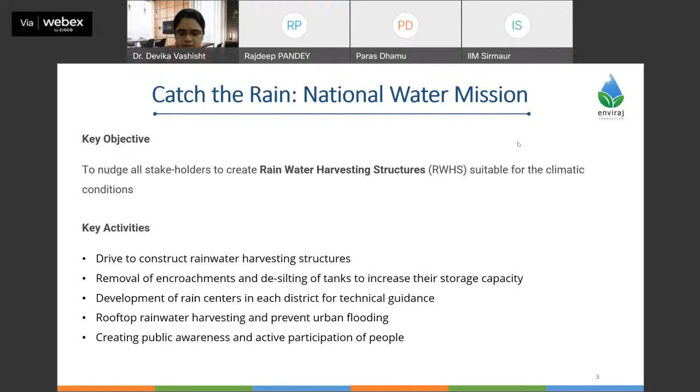So India will be a water deficit country in 2050. If we successfully implement the river interlinking projects that are already undertaken by Government of India, then we can offset 200 BCM, but still we will be water deficit by 127 BCM even in 2050. So I will be presenting another data, that is per capita water availability in India. So in 2001, the per capita water availability in India was 1,816, and in 2011 it was 1,545, and in 2021, recently, it was 1,486.

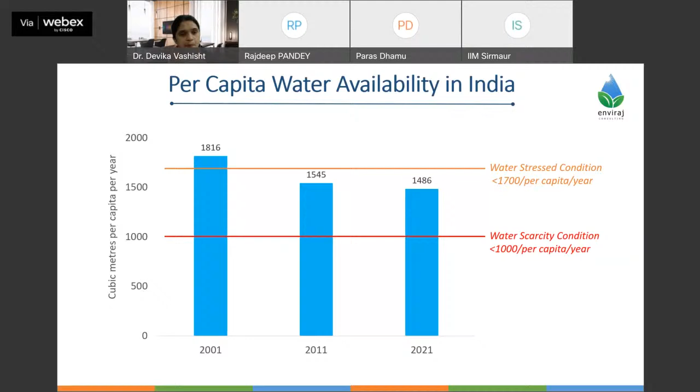So when the per capita water availability falls below 1,700, that condition is called water stress condition. So when this condition arrives, we can see the water scarcity, water crisis across the various parts of the country, that is already happening. So India is already under the water stress condition. And when this value falls below 1,000, in that condition, we can also see the economic impact of water in our country's economy.

So coming to another part of the problem, that is the urban flooding. So water scarcity is one problem, and urban flooding is another problem that is also due to the mismanagement of water. So I will try to highlight the very important case of the Chennai flood that we have seen in 2021. And in 2015, also there was a flood in Chennai. So many of the environmental activists and climate change activists relate every event to climate change. And I am a big advocate of climate change, but believe me, this event is not only because of climate change. Here is the reason, I will explain.

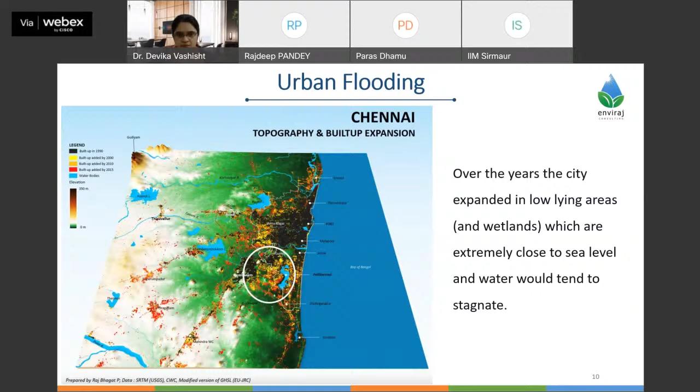So here, this is the topography and built-up expansion map of Chennai. So you can see these dots, orange, red, and yellow. So you can see that the flood-prone area lies in a low-lying area close to the wetlands in Chennai. So the expansion of the city in this area is so quick. So most of the land in the low-lying area is enclosed. So this is the major reason why flood is taking place in Chennai.

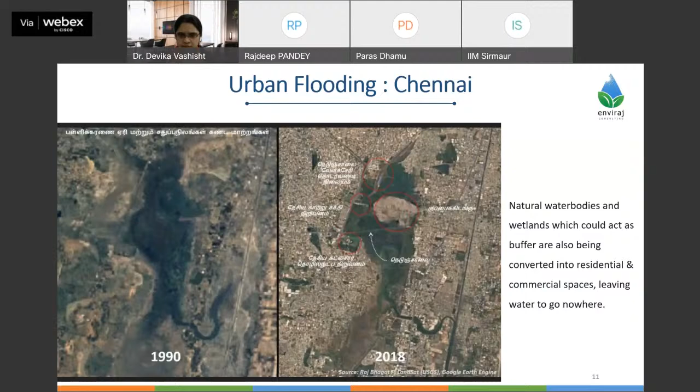First will be the consumption. So talking about the water, we are not utilizing the water as we should be when compared to the other developed countries. Our water consumption is around 30%, whereas other developed nations have this value at 50 to 60%. So we are not consuming it efficiently.

Another reason is water pollution. We are ranked 120 out of 122 when it comes to the water pollution index. Around 70% of the water is already polluted. Third is the rising population. As we all know, India has a big population. India has about 18% of the world population, but we only have 4% of the resources.

And last but not least, climate change. Climate change also impacts the water cycle by influencing the weather patterns, and this is also one cause of water scarcity.

So coming to the ways to conserve water. As we presented, our principles in the water conservation sector: the first is reduce, second is reuse, third is recharge. So reduce the flow. As per many reports and technical studies, in a metro city, for example, 40% of the water is lost during supply in leakages. So we need to fix these leakages, and in every sector adopt micro irrigation to also reduce the consumption.

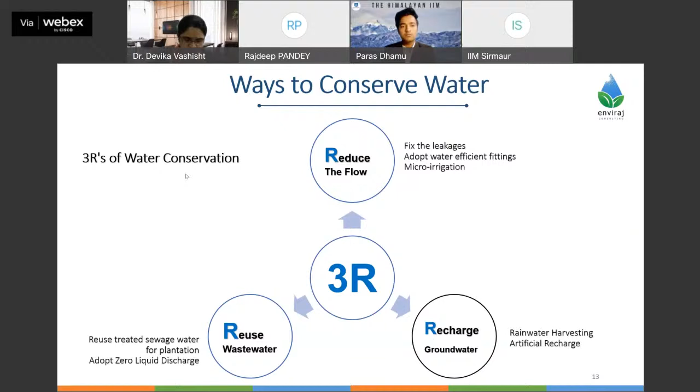Coming to reuse, sewage is treated in the municipality and filtered, so this water can be utilized for farming activities. In industry, adoption of zero liquid discharge can also be useful. Recharge groundwater can be implemented through rainwater harvesting and artificial recharge for the augmentation of groundwater resources. So here we will only be discussing the third, that is rainwater harvesting.

So we will be starting with the basics of rainwater harvesting. Here is a typical rooftop rainwater harvesting structure. Ideally, the water collected on the roof is first diverted through a first flush diverter, and then it is filtered through the filter. Then it is stored and reused, and the excess amount of water is recharged to the ground. So I believe this is clear.

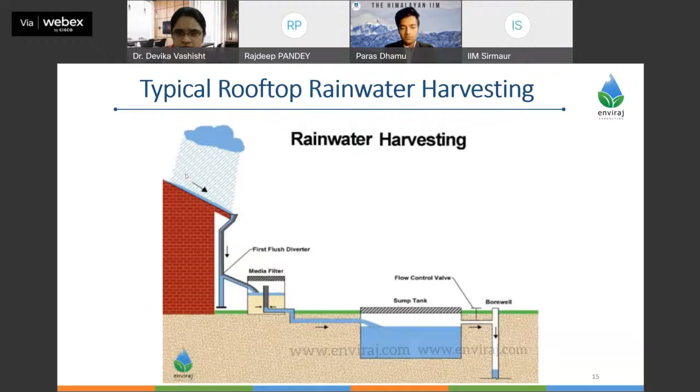And now we discuss the benefits of rainwater harvesting. The first benefit is it reduces the water demand, and it improves the quality and quantity of groundwater. As we know, rainwater is the purest form of water until it falls on any surface and gets contaminated. So when it mixes with the groundwater, due to dilution, it improves the groundwater quality. And it lowers the water supply cost as it reduces the overall water demand. It also prevents floods and reduces soil erosion and surface runoff.

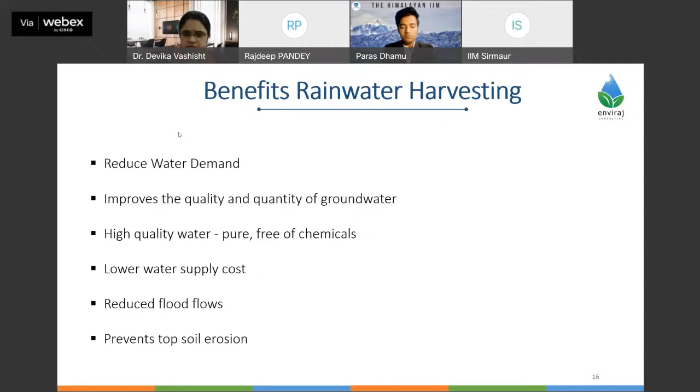And here are the components of any rainwater system. The first is the catchment or any surface.

Sorry to interrupt you, sir, but your voice is not very clear. Hello. Yeah. Sir, your voice is not. Now is it clear? Yes, sir. Yeah, now it's fine. Better.

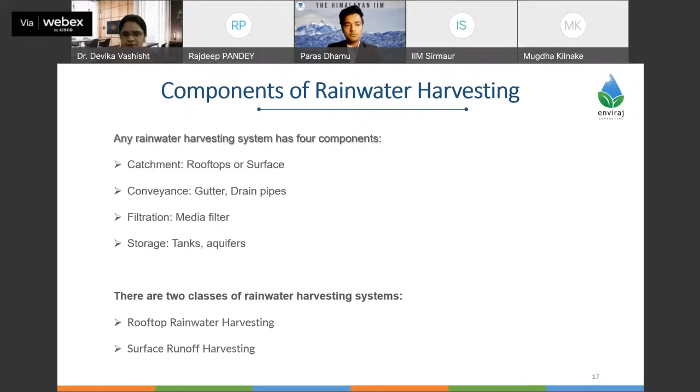Okay. So here are the components of rainwater harvesting. Basically, there are four components. The first is the catchment, that is rooftops or any surface. Conveyance, that is gutters or drain pipes where the water flows. Third is the filtration system. Fourth is the storage, that can be tanks or groundwater aquifers. Rainwater harvesting systems are divided into two types: one is rooftop rainwater harvesting, which we mostly implement in urban areas, and the second one is surface runoff harvesting.

So first we will be starting with how to harvest rain, with the rainwater harvesting potential assessment: how we can assess how much rainwater we can harvest from our rooftop. Here is a very simple formula that I have presented on the screen. We need three parameters. First is the roof area. Second is the average rainfall in my location, and third is the surface runoff coefficient. The surface runoff coefficient is also presented on the screen.

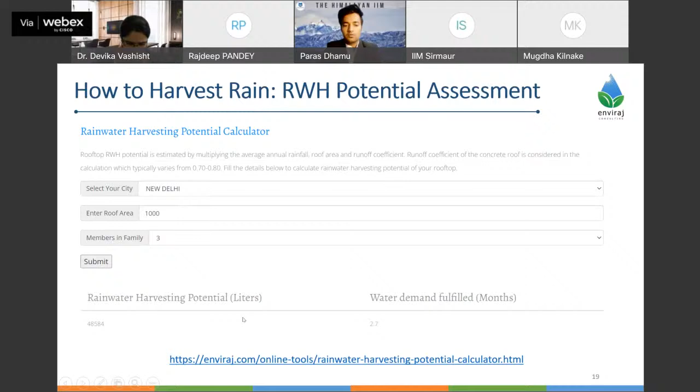For example, if we take New Delhi, and the roof area is around 100 square meters. In New Delhi, around 700 mm of rain falls annually. So around 48,000 liters of water can be conserved from a 100 square meter rooftop. Here is a simple tool that we have developed on our web portal; the link is below. You can select your city and enter your roof area, and easily get the rainwater harvesting potential of your area or city.

So coming to the sizing of the drain pipes. Drain pipes carry the water to the filtration media. How many drain pipes are required for a particular rooftop actually depends on the peak rainfall of that particular locality and the overall size of the roof.

So here is one example. If my roof area is around 500 square meters, and I want a 100 pipe to be installed, and the peak rainfall of my locality is 50 mm, how many 100 pipes will be required for this rooftop?

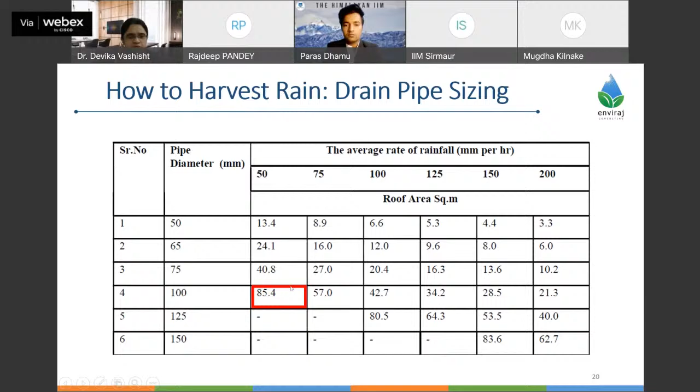So this is the table. First I need to see the 50 rainfall there, and we need to see how much drainage area is there under the 100 pipe diameter and the 50 rainfall. So it is around 85.4 square meters. So I need to divide the total roof area by this value.

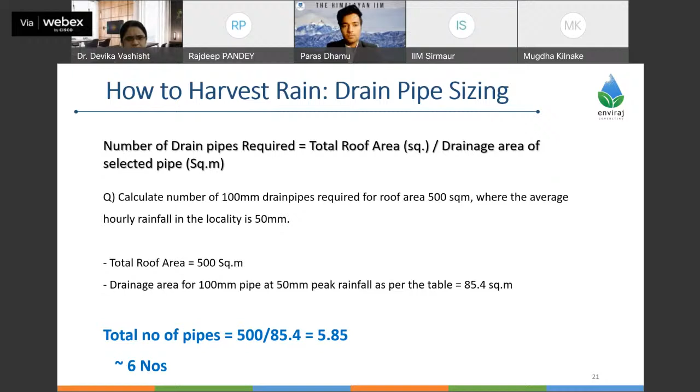So it gives me a number of around 5.85. So we need to round up to the integer, which gives me 6 pipes. So I need 6 pipes to efficiently drain this much rainwater from the 500 square meter rooftop.

So coming to the next component, that is the first flush diverters. The purpose of this is to divert and capture the most contaminated sediment that washes into the pipe from your roof during the first millimeters of rain. Going with the thumb rule, first flush should be able to discard at least 50 liters of water per 100 square meters of roof area.

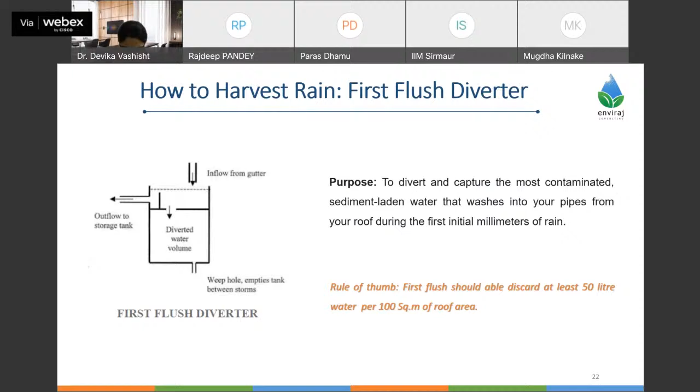So next is the filtration unit. This is very important, whether we are using the rainwater or recharging to the ground. Here is a schematic of the filtration system. Generally the bed depth of the filter media is around 1 to 1.5 meters. The major objective of the filter media is to remove organic material and the silt content.

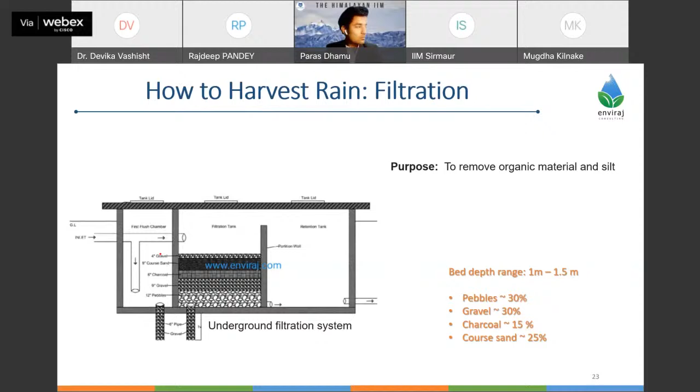The multimedia bed can be made of different components like pebbles, gravels, charcoal for color and odor removal, and coarse sand in a given proportion.

This is the wall-mounted PVC rain filter that is readily available in the market. This is also fine, but these are only suitable and recommended if roofs are well maintained and clean. It just goes with the piping system, so it's easy to install. So coming to the storage capacity.

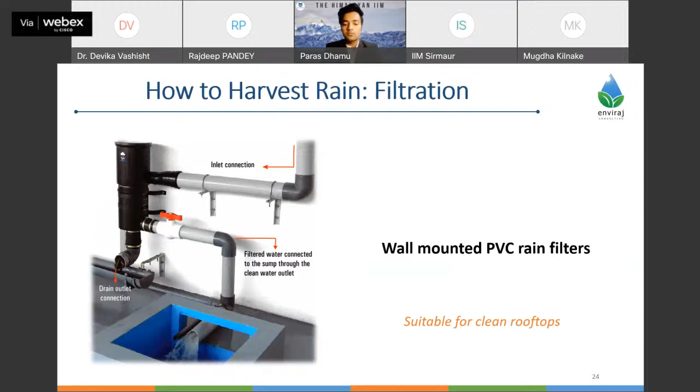For storage capacity, if we harvest, our first goal should be using the rainwater immediately after treatment, so that reduces the pumping cost. While designing the storage, we need to calculate the per capita demand per home. Theoretically that is around 135 liters per day per person, but it actually varies house to house.

To calculate this, we first need to identify our water storage tank capacity in our house, and the refill frequency, in how many days we refill our tanks. That will give the overall water demand of our house, and when we divide that with the number of members, we will get the per capita demand of our house.

Based on that, and how many days of storage we need depending on the water scarcity condition of that city, we can determine the tank storage capacity. It is recommended to have water storage tanks in multiples of 5,000, because water tankers generally come in a capacity of 5,000 liters. So it is good to have tanks of 5,000, 10,000, 15,000, 20,000, and so on.

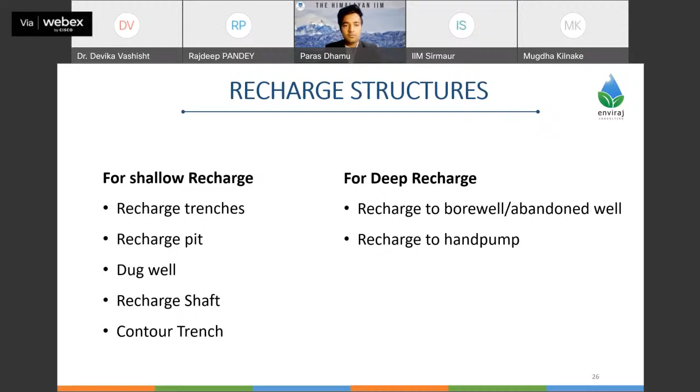In shallow recharge, there are many systems. I have just written the major five: recharge trench, recharge pit, wells, recharge shaft, and contour trench. And for deep recharge, recharge to borewell and recharge to existing handpump. So we will discuss each of them and where they can be used.

In shallow recharge structures, the first one is the recharge pit. The recharge pit is the simplest form of recharge structure, where we need a dug tank-like structure that can be constructed with brick, and this kind of structure is suitable for surface runoff as well as rooftop harvesting. These structures usually have a large area footprint and come at a low cost.

So where space availability is limited, these structures cannot be implemented. Basically, these can be used in parks, big campuses, and farmhouses. And a recharge pit can only be implemented in areas where there is an alluvial formation. In a hard rock region, they cannot be implemented.

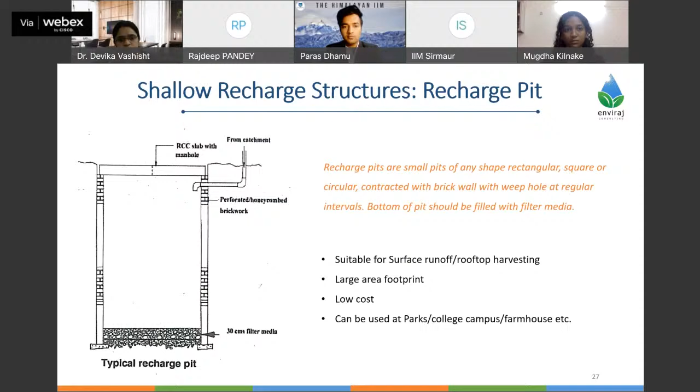Coming to the trenches, trenches are similar to the recharge pit, but these are suitable for small houses, playgrounds, parks, and roadside drains.

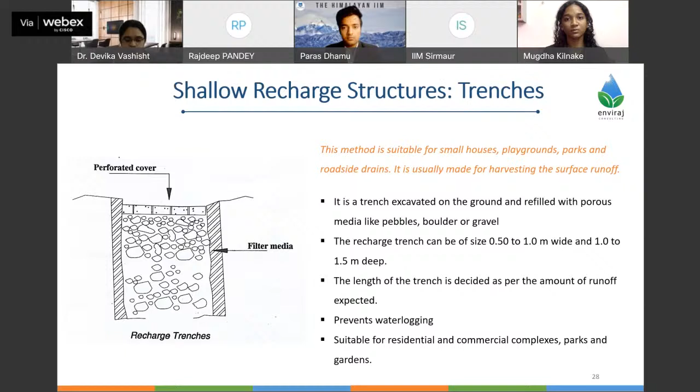So majorly they are built for the surface runoff, and the major purpose is to solve the water logging issue. So generally, the recharge trench can be around 0.5 to 1 meter wide and 1 meter to 1.5 meter deep. These trenches are usually suitable for residential and commercial complexes, parks and gardens.

Coming to the dugwell recharge, if there is a dugwell in the locality, whether it is abandoned or working, this dugwell can also be utilized to recharge groundwater. The only thing is that we need to install the media filter, as we discussed earlier, to ensure the quality of the water that we are recharging.

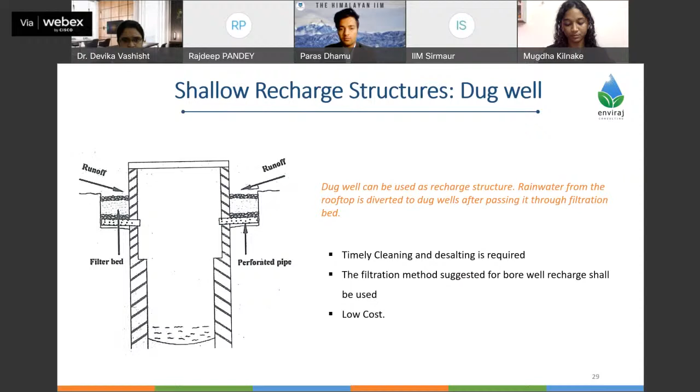The only disadvantage of this recharge method is we require timely cleaning and desilting of this well, and this is a low-cost solution because the major construction cost of the recharge structure is avoided in this kind of system.

The recharge shaft is similar to the dugwell, but it is artificially created. The diameter of the recharge shaft varies from 0.5 to 3 meters, depending on the availability of the water to be recharged. It is generally constructed in a shallow aquifer in a clay surface, and it should touch permeable strata like sand. Usually the recharge shaft is backfilled with boulders and gravel on both sides.

The depth of the recharge shaft varies from around 10 to 15 meters, and it should be constructed at least 10 to 15 meters away from the building foundation.

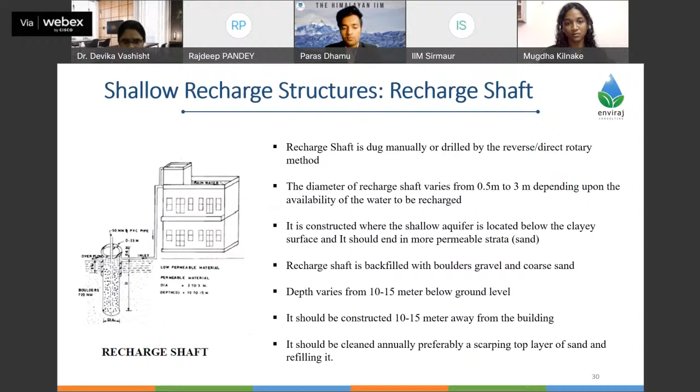Coming to another one, that is the contour trench. This is basically recommended for hilly terrain where the water doesn't stay upstream, and in those regions there is water scarcity. So here I'm presenting the image below.

He's a person who is making these trenches in remote places of Uttarakhand. He is also known as the riverman of Uttarakhand. I met him last year, and he is constructing these kinds of trenches to revive the Shipra River in Nainital. These trenches just store water in them, and slowly they recharge the groundwater.

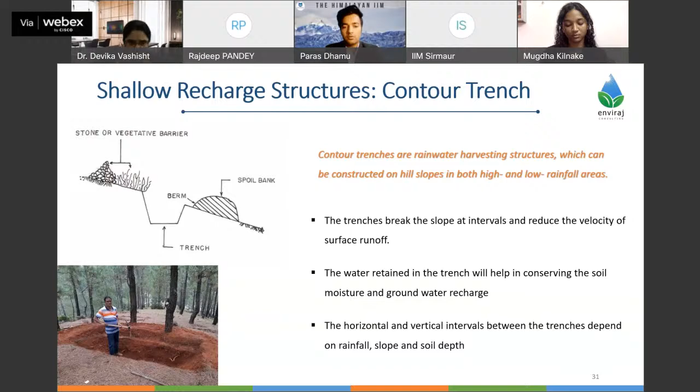Coming to the deep recharge structure. Around the city, there are abandoned or working hand pumps that can also be utilized for groundwater recharge. Generally, small buildings having roof area less than 300 square meters can be used for recharging hand pumps. The only thing is that we need to again construct the filter around this hand pump to ensure the quality of the recharge water.

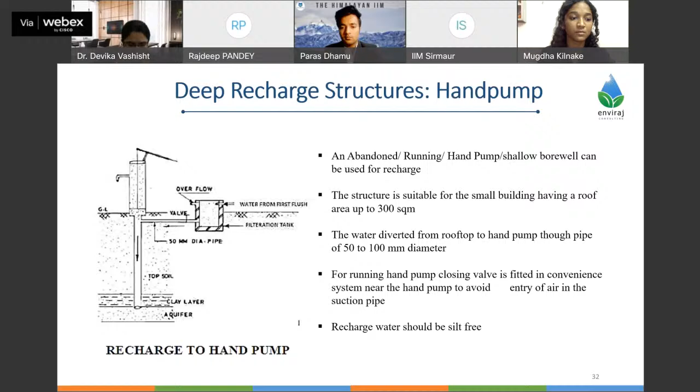Next one is the borewell. This method is majorly adopted in urban areas. A deep borewell can be used as a recharge structure. This technology is adopted where land availability is very limited, when the aquifer is very deep, or where rock formation is observed. Again, the system is very simple and similar to the others. There is one filtration media, and after filtration, the water flows to the bore.

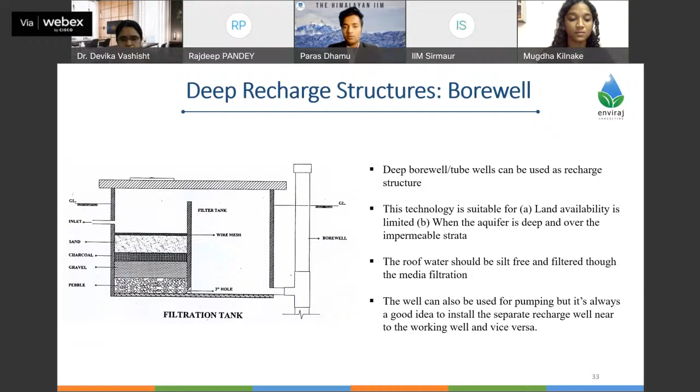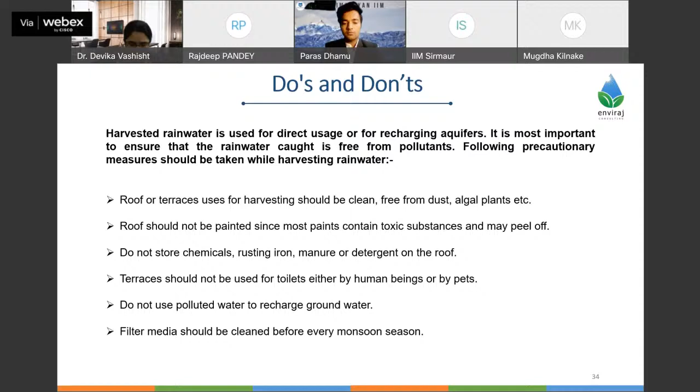Here are some do's and don'ts that we need to take care of while implementing and managing the groundwater recharge structure. The roof should be well maintained and free from any kind of dust. It should not be painted with any chemicals or toxic substances. Terraces should not be used by humans or pets. Do not use polluted water to recharge groundwater, and it is important to clean the media filter before and after every monsoon season.

Now I will be going through the city-wide action plan for artificial recharge that we have submitted to the Nagpur Smart City. I will be describing this project, and when it comes to city-wide implementation of the recharge project, how we can move forward.

After getting this project, we started with the potential recharge zone mapping of Nagpur city. Using GIS techniques, we used several hydrogeological parameters including drainage density, geology, and land use and land cover data. So we have prepared this recharge potential zone map for Nagpur city.

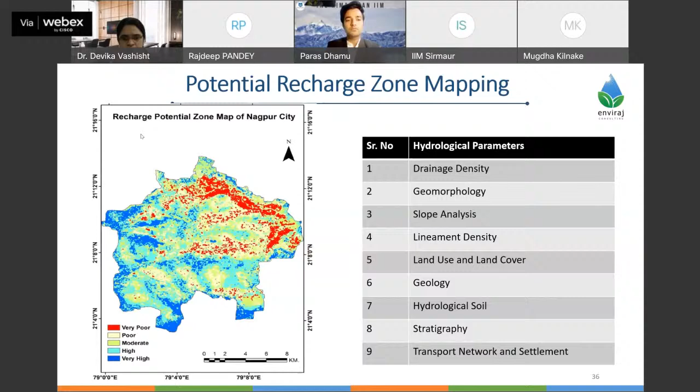So you can see different colors describe the recharge potential across the city. After developing this map, we have done it Prabhag-wise. A Prabhag is like a ward system in Nagpur. So we have done a Prabhag-wise field survey, a perception survey, to understand the groundwater level trends. How do you feel, as a citizen, what are the groundwater trends in the last decade? What's your perception regarding that?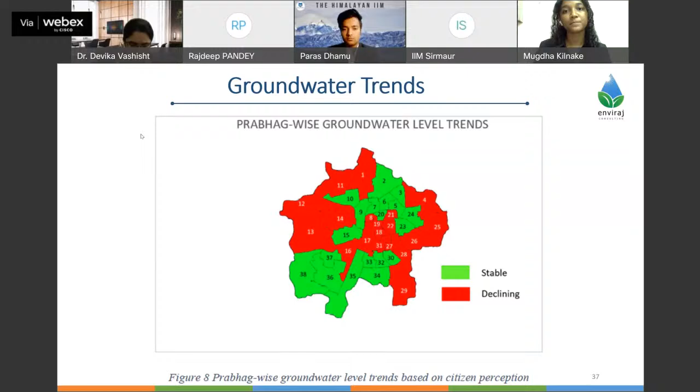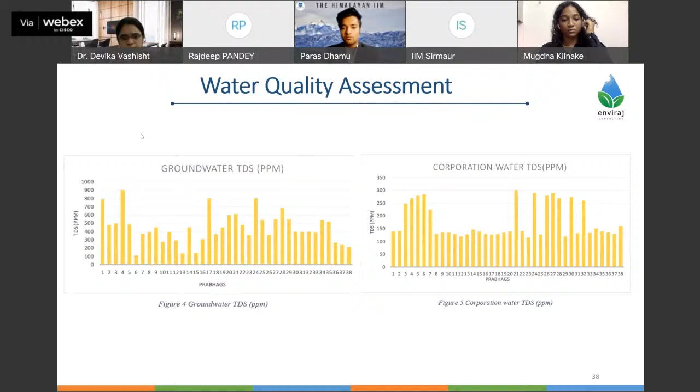Based on the citizen perception, we have characterized the different Prabhags into stable and declining zones. Next, we have done the water quality assessment of the groundwater in various Prabhags. In the water quality assessment we measured the TDS and conductivity levels of groundwater and the surface corporation water. One thing to be noted here is the TDS of the groundwater is low. That means there is a deep water table. So that is a clear indication the percolation rate is high in that region.

After this, we have prioritized the Prabhags based on ranking and weightage distribution. We have provided different weightage to the different parameters. One is the groundwater TDS level, groundwater level, and groundwater level trends. Groundwater level I have not mentioned here. We have also measured groundwater level in each Prabhag physically, so that is also taken into account. Based on this, we have prioritized Prabhags accordingly.

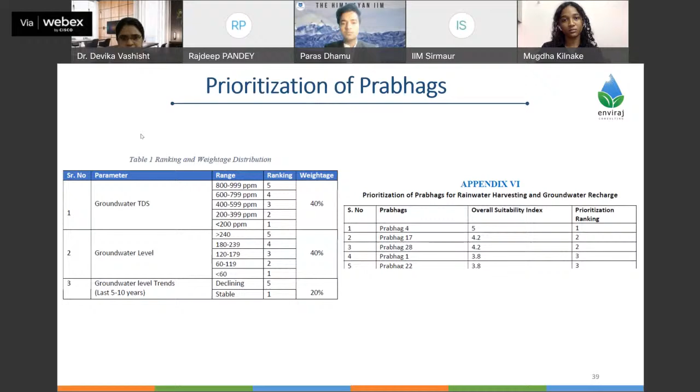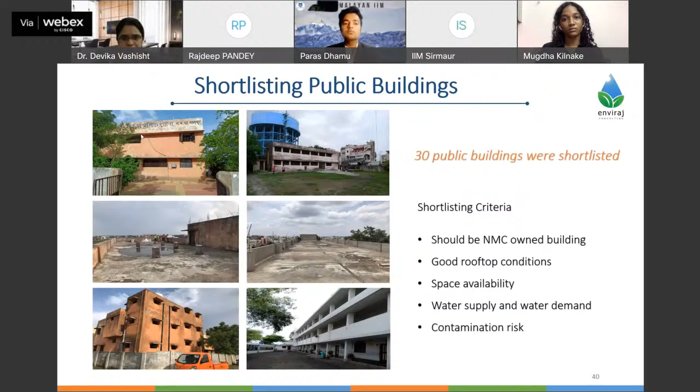After prioritization of Prabhags, on the recommendation of the Nagpur Municipal Corporation, we have shortlisted 30 public buildings for the pilot. Our shortlisting criteria include: first, it should be an NMC-owned public building, owned by the Nagpur Municipal Corporation. The roof condition should be good. There should be enough space available for the recharge structure. Water supply or demand should be matched there. And there should be low contamination risk nearby, like a sewage network.

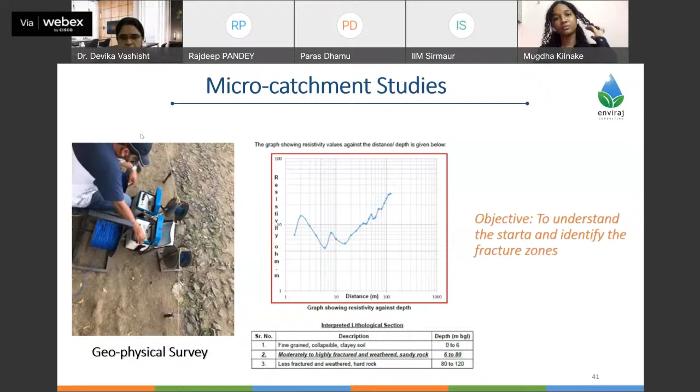Once the shortlisting is done, we conducted the micro-catchment studies there. We started with the geophysical survey. The objective of the geophysical survey was to understand the strata and to identify the fracture zone. Wherever there is a fracture zone, there is a good recharge zone. Next, we conducted the borewell recharge test. The objective of the recharge test is to estimate the recharge capacity of the borewell.

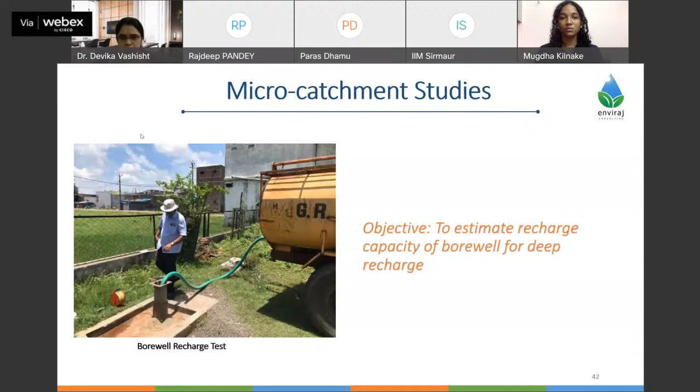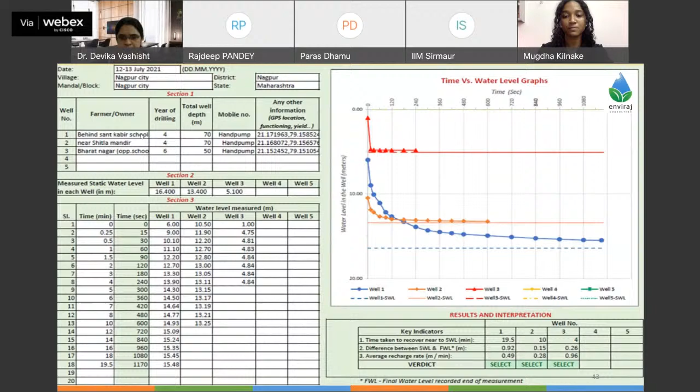In this test, we first measured the static water level and then filled the borewell up to the top of the casing. Then we monitored the water level with time, and this data is plotted in a time series graph. As per the guidelines of the CGWA, we have made this Excel tool to identify whether the borewell can be used for recharge or not. Basically, every borewell should reach its static water level within 30 minutes. If it fails to do that, then the borewell should be avoided for recharge.

After these scientific inputs, we selected the borewell recharge structure in the pilot site. The reason for this structure selection is that Nagpur itself lies in the heart of the Deccan Plateau, so there is hard rock strata everywhere. Shallow recharge systems are not actually possible there. And in the school area, there is limited space availability, so this is the only viable option. We have also identified the fractured zone, which is a good point, and some borewells have shown good recharge potential. These are the factors behind the borewell recharge system there.

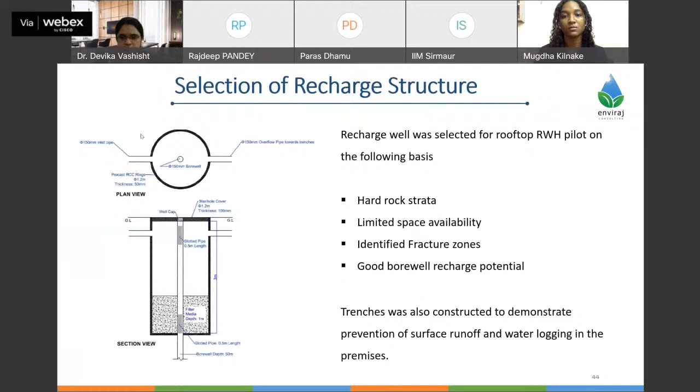We also constructed a trench to demonstrate to the municipality that it can prevent surface runoff and water logging in the premises. That is also constructed in some schools. Before implementing the project, we did the cost benefit analysis, because this is a very important factor if we implement any recharge project on a wider scale. The costs incurred are first the construction cost of the recharge structure, and second the O&M cost, which includes consultancy services and annual maintenance services.

After that, we talk about the benefits. What benefit will the municipality receive from construction of this structure? The first is the saving on water treatment, supply and distribution. If the water table rises and water is readily available in the locality, overall savings on water will be there for the municipality. The second is the savings on sewage treatment. When this water is not harvested, it generally flows into the sewage network and increases the load on the sewage treatment plant.

So it also provides savings on sewage treatment. The third is the carbon credit earnings. So if the energy is conserved in the water supply network and in our sewage treatment plants, carbon credit can be earned and can be monetized in the carbon market. So overall, if we calculate the cost benefit ratio and it comes greater than 1, that means the project is viable.

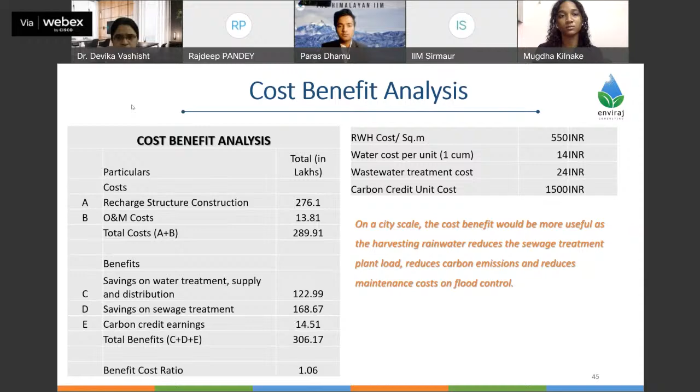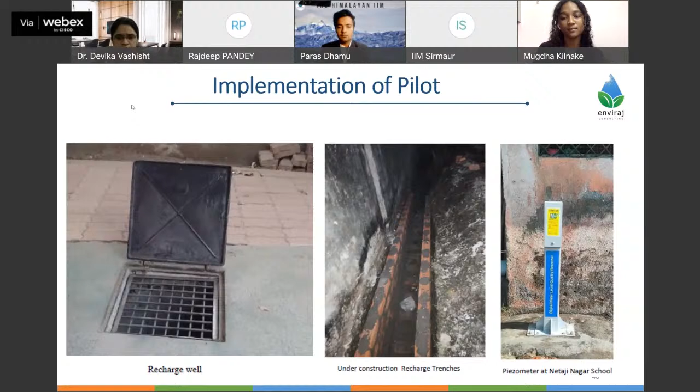So after doing the cost benefit analysis, we have implemented the project on the schools. So these are some of the steps. So next we have framed the monitoring mechanism for them, how the monitoring of this infrastructure can be done. That is divided into parts. First is the water level monitoring.

So generally an observation well should be made near to the recharge structure to monitor the effectiveness of the recharge structure. They should be built adjacent to the recharge facility, but at sufficient distance from the recharge facility to observe the composite effect. So generally, it is suggested that the observation well should be built around 3 meters to 5 meters from the recharge structure.

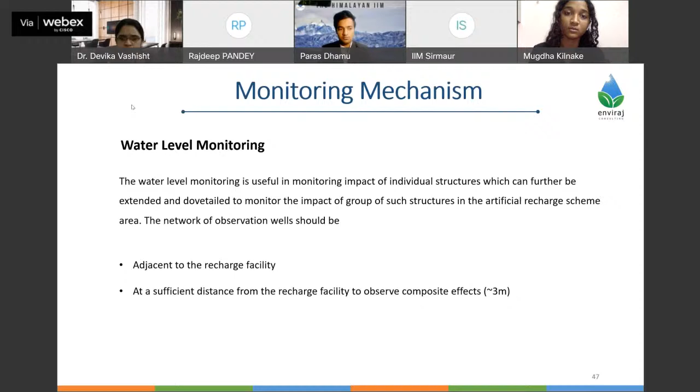And coming to water quality monitoring, water quality is very important to monitor when we are implementing this project where groundwater is already contaminated. So we have recommended the monitoring of water conductivity, which will be helpful in assessing the performance of the recharge structure. Other parameters can also be used like turbidity, DO, pH and nitrates, or any other component of concern in that locality where the water quality is already deteriorated.

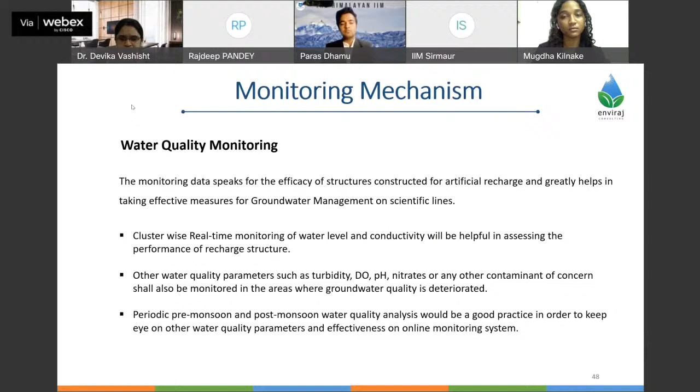Third, we have also insisted on periodic monitoring of groundwater during the pre-monsoon and post-monsoon season. That would be a good practice in order to keep an eye on the water quality parameters and also the effectiveness of the online monitoring system. So next is the impact assessment, how we can assess the impact of the project in indirect ways.

Green vegetation cover may increase in a zone due to the increase in soil moisture in that locality. And quality of water may also improve due to dilution. As we have already discussed, rainwater is low in TDS, so due to the dilution effect, the TDS of the groundwater may decrease.

So lastly, here is a short video I want to play. We have implemented this pilot project, and probably this is the first IoT-based rainwater harvesting project in India that we have implemented for our smart city.